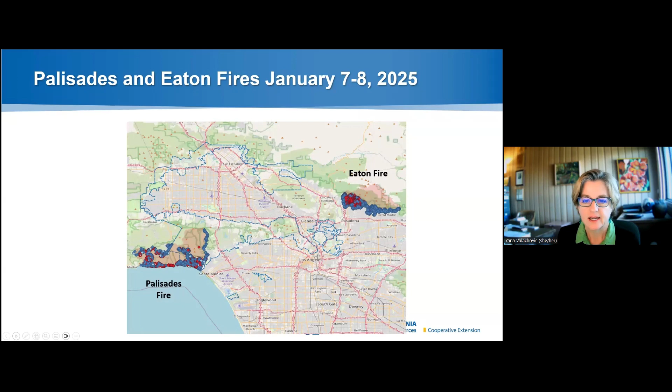And I just want to start by saying, I hope this talk isn't triggering for anyone. I'm going to talk about real communities, and my heart goes out to all those that are affected. I can be a little dispassionate about the impact because I'm looking at it from a learning opportunity, and I feel very blessed that I don't know anybody in these actual images, so it's easier for me to talk about it analytically and not be talking about real people's lives. So I get that this is hard for a lot of folks.

So what I'll say is that you see more in the vegetation and in the surviving structures than you do in the ashes. So most of my work really focuses on looking at those surviving buildings and trying to understand what was their secret sauce, if you will, like what made the difference in their survivorship.

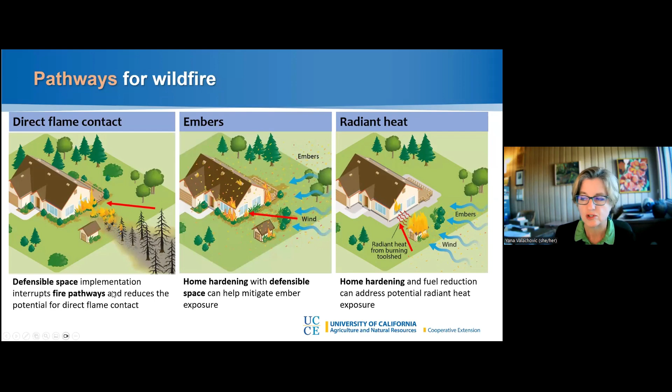So, I want to just acknowledge that when you get the intensity of wind that we saw in Los Angeles for the duration that we did, you end up with a lot of firebrands. And this is from a colleague, Faraz Hedayati at IBHS. This is on his LinkedIn post. Gotten a lot of views of it. I'm including the link for it.

And so he writes, in just 5 seconds, thousands of embers are generated from small fuel loads, some launching from the ground level, others from treetops. And while many burn out, countless embers rain down on downwind homes, striking siding, bouncing off the wall, accumulating at the base of the wall. And anything that's within that first 5 feet, or zone 0, is likely to be ignited.

So short flames start to ignite buildings, growing quickly into tall flames, which stretch and then bend over or tilt into the wind, creating this what feels like unstoppable destruction. So in my hand is an example of a cold ember, something that had been moved as an illustration. And just to say that in this set of fires, we experienced a lot of ember generation, and embers are really capable of finding those weak points in our buildings and exploiting them.

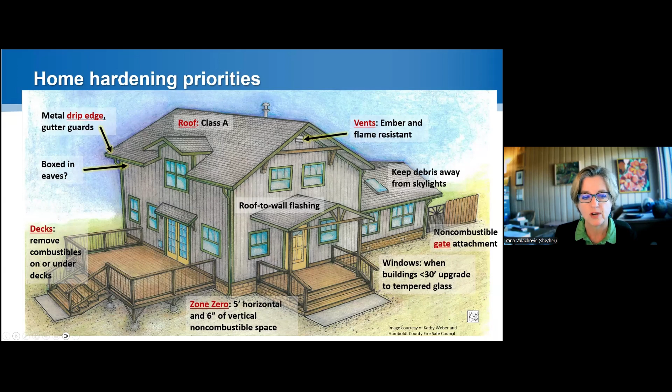And the question is, how do you apply that in a situation like Los Angeles and the Eaton and Palisades fire? So much of my education work and extension work is really trying to help people see where those vulnerabilities are in particular structures and talk about them specifically, and then figure out what the best course of mitigation or maintenance might be. So not going to go through this in detail, but just to hint that there is a lot of collective evidence and good management practices that people can deploy.

In both the Eaton and Palisades fire, we've got a lot of buildings that are built in the 1940s and 50s and 60s. So these are buildings that have been around for a while. So they start to have wear and tear in them. The materials that are used can start to break down, or they're maybe just not the most resistant to fire exposure. So, we hope that you don't get fire movement into these urban environments. But when you do, that's where things get really complicated.

So in Los Angeles, we have that transition from the wildland. We have connected fuels that bring it from the wildland to the structures, and then we move into a structure-to-structure type exposure. And you've got multiple pathways for fire to continue to expose each of those structures. So, this is not unique.

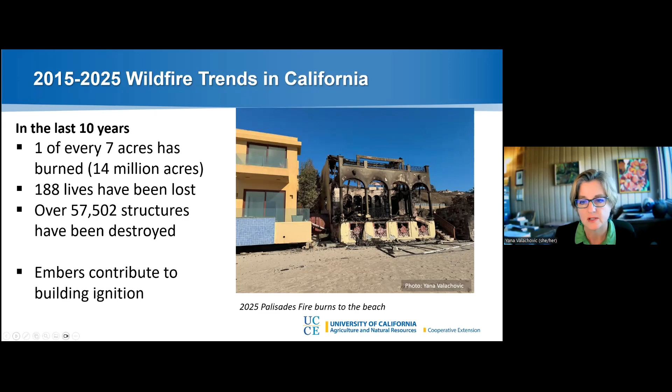So, again, looking over the last decade, we've got the Tubbs fire in Santa Rosa, we've got the Carr fire in Redding, we have the Camp fire in and around the communities of Paradise, the Hopkins fire in Ukiah, Coastal fire in Orange County. Each of these have some unique attributes, and then they also have some elements of commonality. And all of those really are related to vegetation to house, and then vulnerabilities, typically with vents and embers. There are some nuances within that.

The Marshall Fire, which was in Boulder, Colorado, and these are all fires that I've been involved doing some post-fire work, except for Lahaina, Maui. They all have some kind of signature. And the Marshall Fire was really about how wood fences served as the wick to connect to structures. And that's because in Boulder, Colorado, there's not a lot of natural topography or vegetation to give privacy. And so we use fences to create privacy.

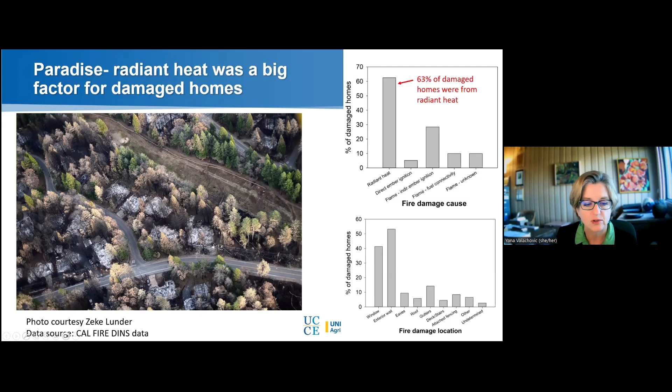My colleagues, Eric Knapp and Steve Quarles and Nels Johnson and I put together a paper looking at the effect of California's building codes and how those were contributing factors to building survivorship. And I've made the link here. But just some of the visuals here, I just want you to see is that where a block is intact, it's intact. But once you get ignition in one part of that block, you tend to have this exposure issue that the

other buildings are causing. And what we found in Paradise was that 73% of the homes were within 18 meters of a destroyed structure. So that's about 59 feet. So this building to building relationship is a really big driver. When you plop that into Los Angeles, you've got higher structure density and you've got closer buildings in proximity to each other. So, that distance is even more important.

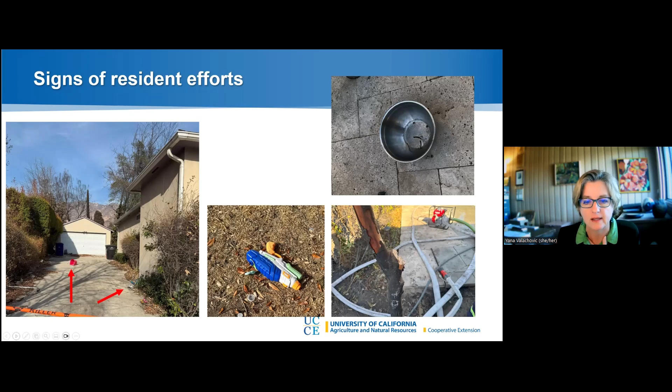So, I want to say that the pump to me is not one that I'm feeling super confident about based on what I saw, because the conditions really escalated. And so, you really needed to know what you were doing and be prepared and dressed for that setting. But you can see these valiant efforts of buckets, of blenders, and people trying to make some stand before they felt like they needed to leave. And so that is the emotionality and the heart wrenching part that I think I experience when I do this work.

Here, there are lots of examples of how people put vegetation in places that is risky. We talk about ladder fuels in forests where fire can stair step and climb up from low vegetation up the ladder of the branches to something taller. Well, here's an example of how in 2 places we had full ignition of that vegetation, and it was putting pressure on the under eave areas of both of these structures. In both cases, there was someone who came in and made a difference.

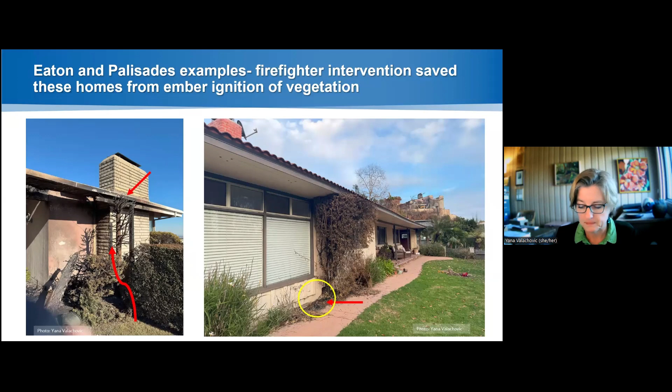I'm basically looking for pathways of damage to the structure. And here's an example where I feel pretty confident that it was the bushes in front of this building, which is stucco-like. I think we call it EIFS, a little different than the old-fashioned stucco, but by the level of charring and consumption on these bushes, I think this is the pathway that led to the failing point of the windows here.

The reason the building hasn't collapsed in this case is because this structure, which was built, I think, in the 90s, uses steel framing, which helps keep the walls erect. Not necessarily helpful for fire protection itself, but that's why you see in a lot of my images more buildings standing up than just ash piles.

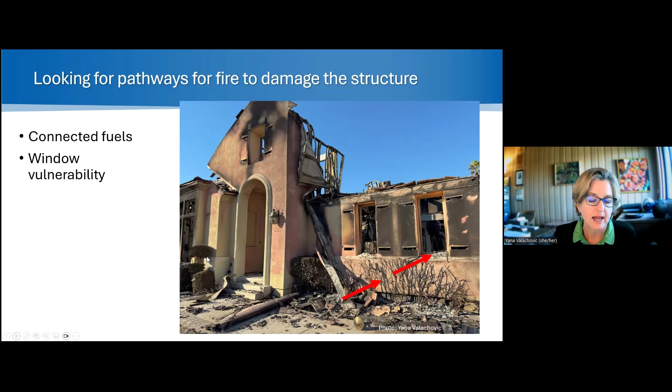So let's see, I want to show you another video here. And this is in the Eaton fire.

And I don't have any narration over the top of it, but fire basically is traveling through the backyards. And there's this really good usage of a patio. There's some vegetation that's close to it. A lot of block walls are common here. Here's a metal gate. And you can see that they more or less have that first 5 feet clear.

Got some consumption of some things that are left in there. Metal gate again here, then transitions to a wood gate, which someone has forced open. And then when you look over the wall, you can see basically complete loss of the adjacent building. So there's some interesting observations around how walls affect the transmission of heat and give some more heat protection.

But then as you come towards the front of the building, you can see that we had consumption in the wood mulch. And then here's where the water shutoffs were. That's where the garden hose is. And so there definitely was ignition around that building. But I look at that and I go, wow, there's just a few details that would have helped even more in this particular example.

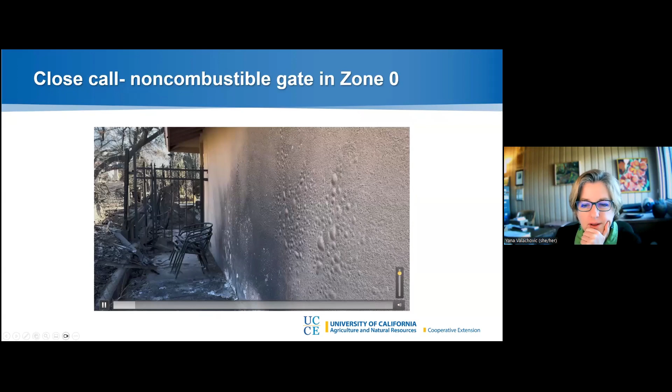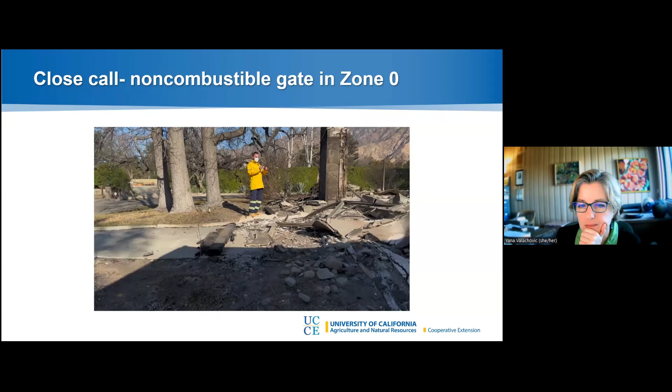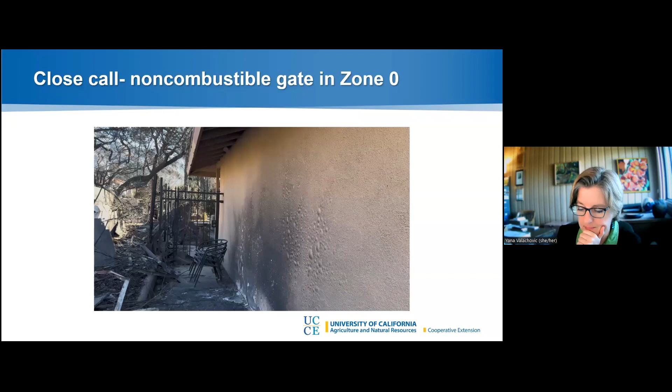Here's another one. I'm going to flip it around a bit so that we can get some wider view on what this looks like, where we're at this interesting place where we've got some damage and some lost structures. Mountain view behind us. And you can see the damage on the stucco siding. And it's a lot of fascia damage, to my surprise.

What we've been seeing in this fire is that the stucco construction helps hold in the heat as the building burns, and then it later collapses, which was likely what is slowing some of the heat damage onto the adjacent building. But walking down this way, you can see that this gate was really critical in not wicking the fire

to the building, where here is the remnants of the wooden fence that was separating the two properties. So a great example how they disconnected the fence to the structure, and I think that was really key in that example.

So here's another story. This is in Altadena. This home's built, I would say 40s, 50s, somewhere in there. I'm using the garage, which is behind the images here, as some evidence where the garage has single pane louvered windows, and the front house does not. Somewhere along the line, they replaced the windows and added these double pane glass windows, which I am going to attribute to being really helpful in protecting this structure from the amount of heat that comes from the adjacent one.

So if you flip around and stand at the garage here, this is what it looks like when you flip backwards. And so there was a fence that had wood panels, but it had masonry block in between. The wood fence burns out, but these windows take on a lot of heat, and there's some broken panes in here, but they don't fail completely. And this building survives. I don't see firefighter intervention on this structure.

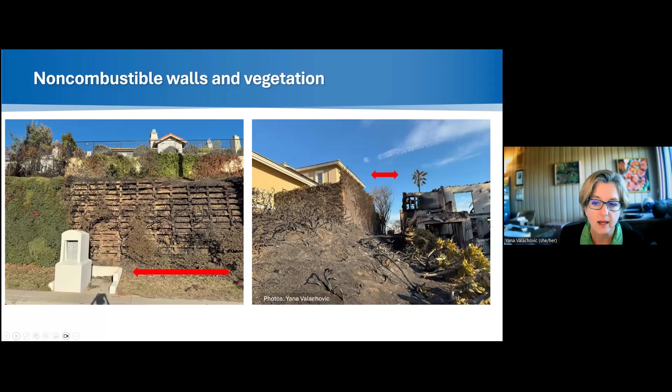So I think in the rebuilding efforts, thinking about how we manage the visuals between two structures and when there is usage of this masonry block, I think is an important issue. At the same time, the masonry block helps to hold some of the heat from one building towards the other and provides a little more protection. So the masonry block walls, I think, are useful in these examples here. And it's the first time that I've been in an environment where you see a lot of those.

Here's some more examples of the steel framing and how it keeps these structures with the walls still standing. Kind of looks a little bit more like a ghost town. And if you poke in, you can start to see on the right-hand side what that steel framing looks like. And that's how you get these kind of interesting images.

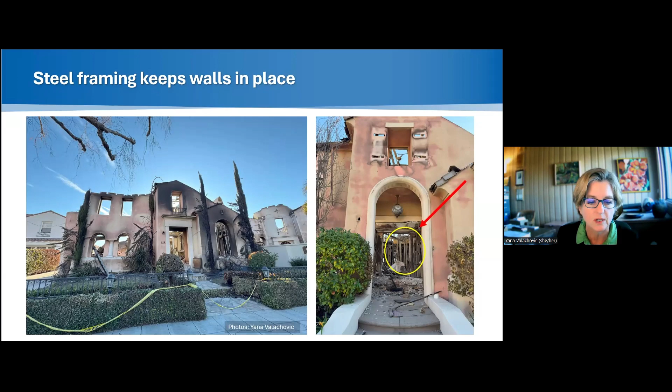So what do we do? And I'm going to try and wrap up this talk. There's a lot to be said. There are a lot of big things to think about here. I just want to reinforce that exposures in Los Angeles were uneven. Not every structure that survived took on heat or took on embers or had direct flame contact. And so they may not offer a great illustration of having the right stuff.

I want to be thankful and grateful that those people have buildings to come back to. So, not a critique, but really appreciation, but just to understand that when you see a structure that does survive, you don't always know what its story was. And there are many examples of firefighter intervention that really made a difference. And some of those are really small actions.

And so if you saw my blog this last week, I really talk about this idea. Well, how do you interpret that? And I think what it means to me is that just needing a little bit of help is a huge improvement over needing a lot of help. And what I see in Los Angeles is a general style of construction that I think is pretty modifiable, is able to create more fuel disconnection, tends towards this idea of the first 5 feet generally not having combustible items within those first 5 feet.

So being able to implement the new defensible space zone called Zone 0. And because stucco is so common there, it won't be that hard to retrofit existing structures to upgrade their vents so that they can resist embers. So I'm really optimistic about the potential for retrofitting and designing better and building better in Los Angeles going forward, and in other parts of California and other fire-prone locations throughout the West or throughout the United States.

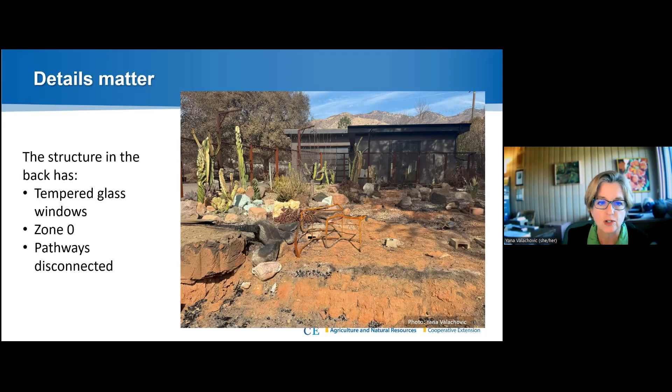So, how do we mitigate wildfire risk? There are many options at the home scale. There are collective actions that happen at the neighborhood scale. And then as you start to aggregate those all out, that's what really helps build that robust quality within communities. And so, I just want to thank you for joining me and sharing some of what I'm seeing here, and I hope that you all can bring back some messages to the communities that you work within around ideas that there are details that matter, there are actions that can be taken.

So, as I conclude, what does the future look like in the LA Basin? I think it's going to be really up to LA and the community there to help define that. We've got lots of vulnerabilities in our built environment, and examples of how we build these communities into places where access and evacuation is really complicated. And so, we've got to figure out ways that we can create temporary refuge areas, redundant access so that there's alternate routes so people can get out, and really harden the structures so that they are much more robust to the types of fire exposures that they will experience into the future.